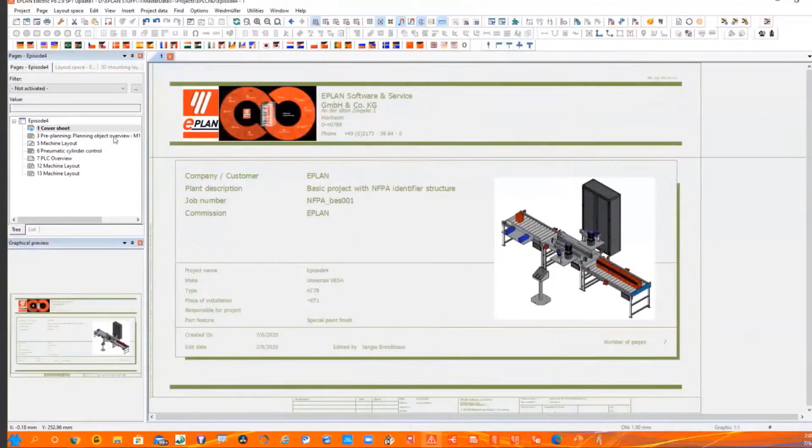As we proceeded with our episodes, we saw all the different facets and steps, and we derived from our project settings that during our pre-planning phase and schematic generation, we ended up with a pre-calculation of the amount of IOs that we need. Since the topic of the day is PLCs, this is what we're going to tackle and how we're going to blend this information together.

Knowing full well how we proceed through our different engineering processes, we have certain schematics assigned to our pre-planning objects. As we saw in previous episodes, we can insert these. And as we insert these different objects into our schematic environment, information is being produced. The benefits of all this are ease of functionality and the fact that we can also benefit from drag and drop and ease of use tools.

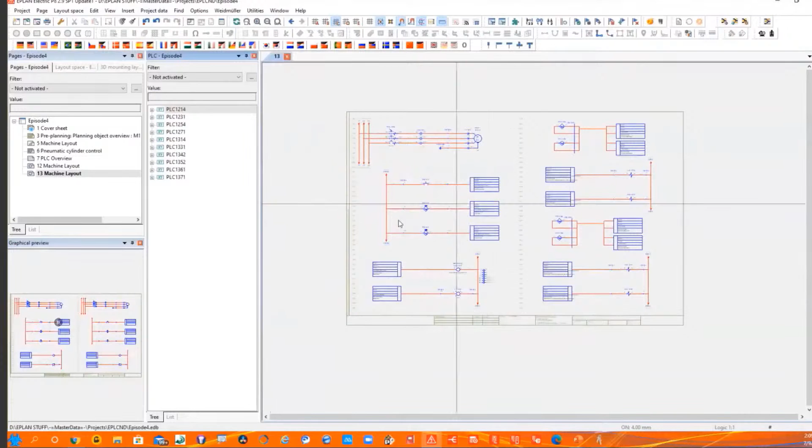As we're using and building up our schematics, we're putting PLC information inside the schematics. That PLC information will be found inside our navigator, depending on the IO. As we saw previously, even from this particular environment, we can also create different PLC overview sheets that give us a lot of detailed information. What we'll end up doing is use other tools to merge that - just as we saw in the animation previously, we want to avoid that separation between two disciplines.

What I have here is an environment, which is basically the Studio 5000 Architect. We do have other applications that we can communicate with, so we'll look into those eventually in some other episodes. But the benefit here is to have import and export capabilities. Based on our design, we saw from the pre-calculation of our pre-planning environment with our report that we have a small, simple project that needs 10 outputs and 13 inputs.

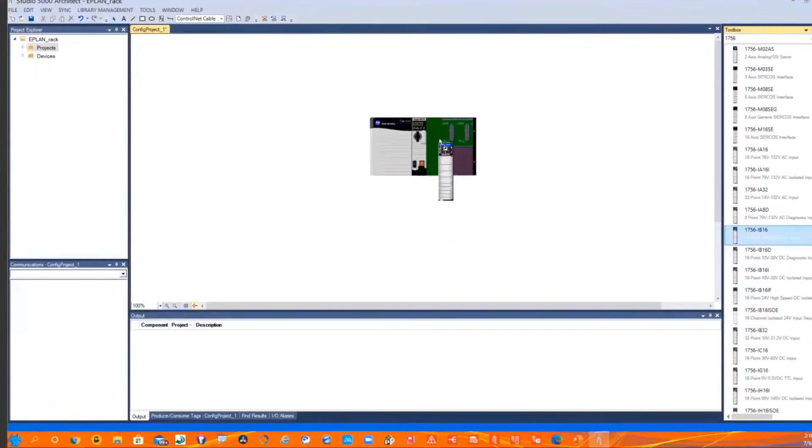So basically, an A4 rack would do me justice here. So if I drop in an A4 rack and go ahead and grab the controller, dump it in - again, the benefit of starting to work with easy and ease of use tools, the benefits start to unfold. Of course, the interaction and ease of use functionality greatly help.

Of course, you have to know how to use these tools eventually. But this is like any other application that you need, especially with the progression that these environments are going through and expanding, and all the changes - especially with the current situations - these are things we have to take into consideration. How do we make these things faster?

As you notice, what I exported is an AML file. We discussed AML in our podcast, so be sure to tag along, follow us on the podcast channel, and you'll benefit from all the cool information out there. AML, being the weapon of choice, has a lot of capabilities.

We're going to grab that file and import it into our project. So here, choosing the import data, I'm going to grab that AML file, choosing the one I just created, and bring that in. Basically, the system brought in 4 devices and 1 CPU, and I'm good to go.

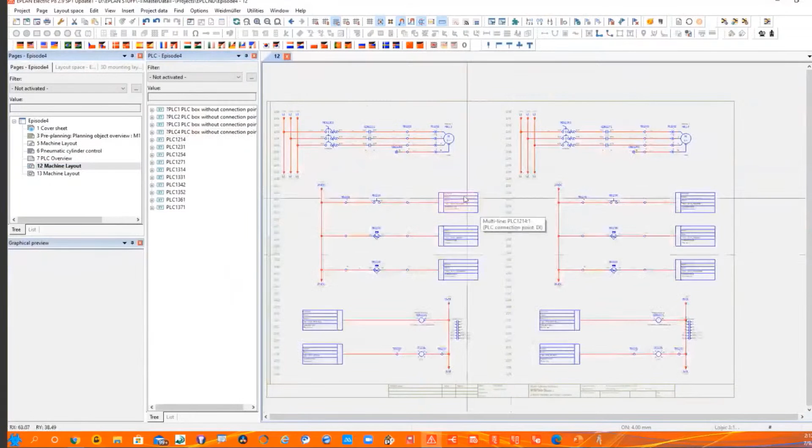So these devices are here, but they're generic. They're not necessarily correlated with my design. These inputs and outputs that I have here are brought in based on the macro tools I'm using, and they have generic information themselves. So here we have pin 111 and so on. There's no real correlation.

I'm going to grab that information and blend those two together. So grabbing the information that was brought in from the PLC tool, I'm going to blend that in. To do so, I'll grab a little filter to start with my inputs first, grab all my inputs, and choose here PLCs, and say use connection point blockwise.

From here, what I'm going to do is assign it to my digital IO card. I know I need 13 pins or 13 points, so I'm going to say 8 here, 1, 2, 3, 4, 5 — that's going to be my 13. They line up.

Now you'll notice that my connection points and all the data that was exported out or brought into my Eplan tool will now inherit the information that I had in my pre-planning environment. As soon as I hit OK, you'll see pin 1, 2, 3, and I have all the information and description aligned. I can proceed now to do the outputs.

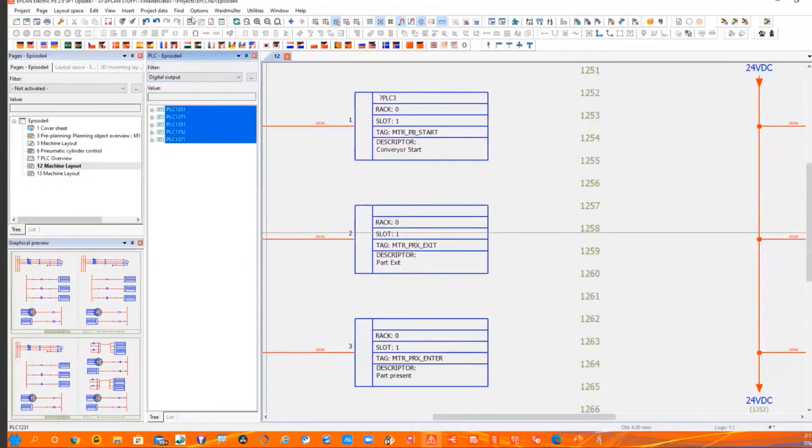Very simple steps. The benefit here, again, is the capability of having a tool that gives you an ease-of-use workflow, regardless of the fact that maybe back in the day you used to do things a certain way — that's 5, 6, 7, 8, 9, 10. Yes, I had to use my fingers when I was in school counting and doing math. But basically, once you grasp your head around these concepts, these tools will give you great benefit in the long run.

Having that done and integrated all my information, if I go here to my rack-oriented view, I have my project, my station, my rack, and all the different tools and hardware. And here, basically, I have some information that correlates with it.

The idea, again, is the principle of being able to have these two tools interact with each other. It's not a direct communication per se, but the concept is being able to grab this information and manipulate it in 2 instances by means of import and export, as opposed to using a third party, a script, or an Excel spreadsheet with macros.

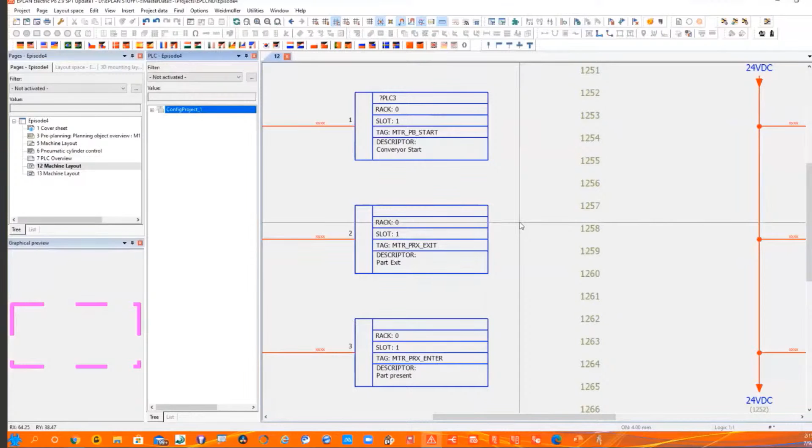All these tools are great. They all work. There's nothing wrong with any of them. It's just that there are certain benefits once you have your concept wrapped around — you can do these kinds of things. Hopefully this enlightens you on this topic. Let's go back here, and here we go.

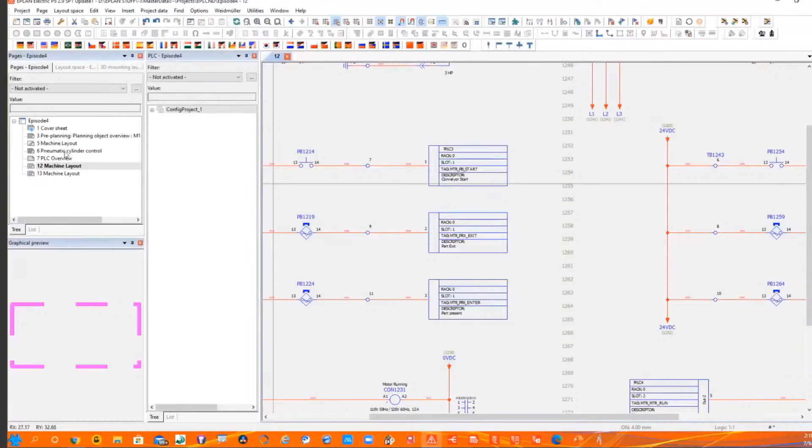Yes, of course. There's schematics to PLCs, but there's also PLC information we can bring in—whether inserting a device, like a PLC device, we can bring it into the schematics, benefiting from all the different functionalities as I showed earlier. If I grab an overview sheet from the PLC, I can, from the schematic point of view, grab that PLC IO card, drag it into an overview sheet, and I'll have the overview information of that sheet, along with all the representation data coming from the schematics into the PLC environment and so on.

So yes, from the PLC to the schematics we can import, and from the schematics to the PLC we can output.

Excellent, we have another question: can you generate blockwise macros via PLC to generate schematics?

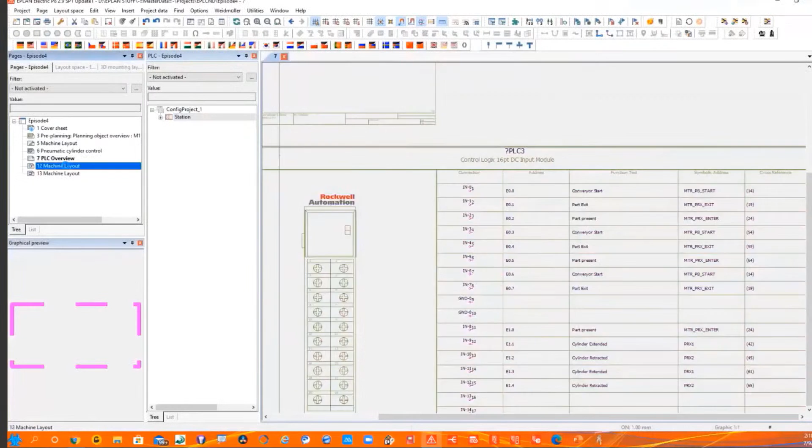Blockwise macros—okay, I believe, correct me if I'm wrong, we have the bitwise technique represented here, and this is probably not a technique a lot of people are familiar with. The benefit of this technique is that we can show on the schematics just the IO points that we require. As you just saw me do in the PLC overview, I can have the whole card overview in the form of a report that reflects what's actually happening in the schematics.

But inside the schematic environment, it all depends on the macros associated to your parts. In the part data for these objects, if I look at the digital input card and the properties in the part information, you can associate a schematic macro that you'll use for the auto generation function.

So this macro will be utilized to create—this is an overview, but you have multiple representations for this particular macro, so you could have a multi-line schematic, a single line, an overview, a whole bunch of them. These are the ones represented and used in the auto generation, so it's up to you to fine tune it.

We do have courses being put together on these, and we also have macros—the data portal has some macros available. There's been a lot of feedback about the data portal parts, so we've created a data portal standard and sent it out to all the manufacturers. They're starting to abide by those regulations, so hopefully it's up to them to put these things together better, and we should be getting benefits from using the new macro information and working with all these different features.

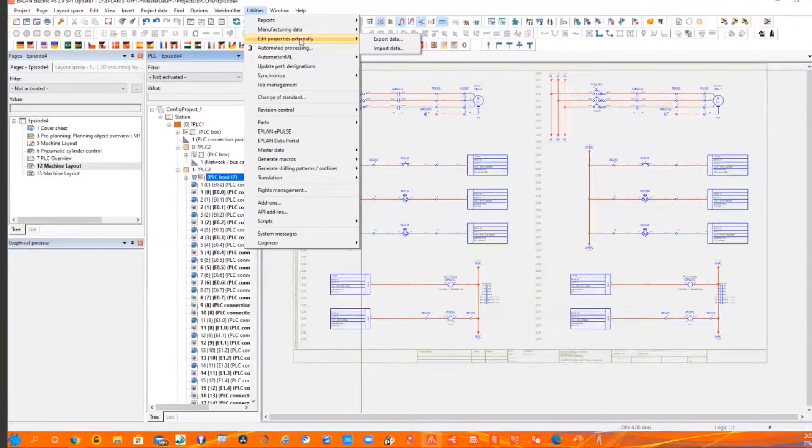There are also coaching services. One key factor could be for users who want more in-depth coaching, just like if you go to a gym, paid the membership, you're working out, but you want that extra oomph, you get yourself a coach who gives you all the tricks and tips.

Same concept, so let your sales rep know that might be something you're interested in. Thank you, Sergio. So we have a couple more questions. What information do you have to put into the parts in ePlan to be able to transfer information such as function text to Studio 5000?

The function text is technically the information that you get from the IO point. The function text property, or this basically would be the property, the description property, and the symbolic property. There are certain attributes. A lot of people have this misconception that it's just a magic wand. You purchase the license of ePlan and you can just sip your coffee while ePlan does everything for you, which is not the case, and that's with any tool out there. There are certain fields and properties that need to be populated.

We have some tech tips online. Rockwell created a white paper that's online that you can get your hands on, which really is a deep dive into the integration between ePlan and the Rockwell tool, as well as other applications out there. There's certain documentation in the ePlan information portal. If you Google that, you'll find tech tips there as well that explain what fields need to be populated.

So in this particular case, the function text will be converted over to the description. The symbolic address will also be brought into the PLC program in the proper fields. Just an example of need-to-know information.

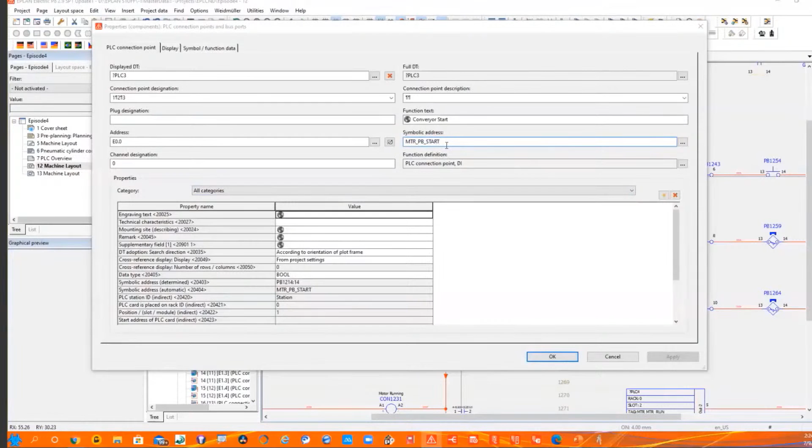These are knowledge-based information that you can ask us in support, and even with the coaching service, we can look at this more in depth.

Sorry to do this to you, Andrew, but we had two more questions come in right as we started the outro. Great job, everybody.

First one is, in your demo, you used Studio Architect. Is it also available in Pro Panel? There are packages available in Pro Panel. You would add the add-on of the PLC into your Pro Panel environment if it's something that you require.

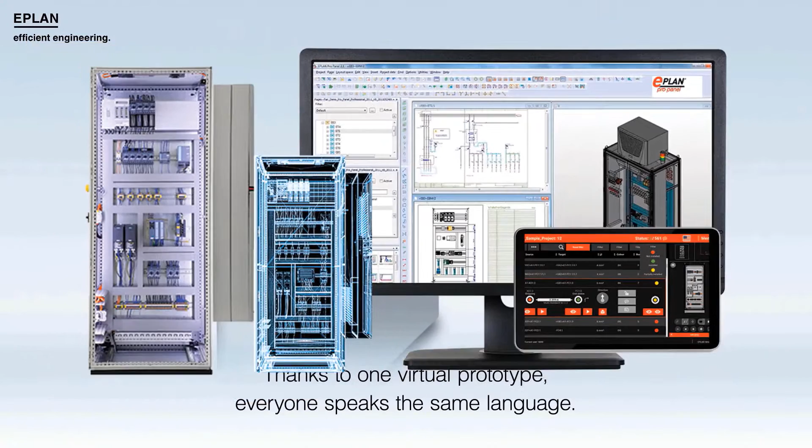Smart engineering stands for a smart connection of electrical, mechanical, and software data. Thanks to one virtual prototype, everyone speaks the same language. It opens the door to smart production. The digital twin with 3D info and other smart data ensures smooth communication between man and machine. The better and more accessible information is built up in the concept, engineering and production phases, the less time you'll lose later on in case of downtime.

You can also store everything in the cloud, so everyone has direct access to the right digital data at any given time. It's crystal clear: working in an integrated way creates added value, shortens the lead time of your projects, and reduces downtime in case of a breakdown. This way you create great added value for your product. Do you want to know how you can do this? The different solutions within the Eplan platform support you towards an integrated engineering and production process. Your digital transformation with Eplan.

Digital data has become a primary focus for product development and production, with manual and automated processes of panel building. Having standardized and digitally provided data is becoming a necessity. User errors are expensive, and implementing the correct set of wiring can be tedious and oftentimes daunting.

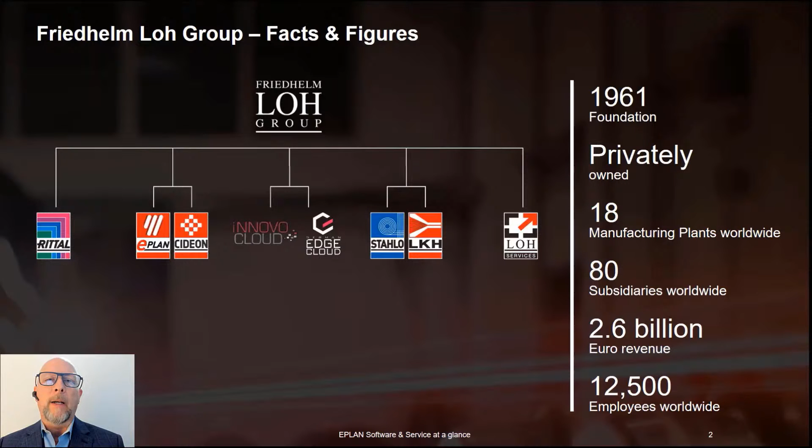Eplan, along with their sister company Rittal, are part of the Friedhelm Loh Group, a €2.6 billion company with over 12,000 employees worldwide. Eplan itself has 1,100 employees across the world, with 58,000 customers using 190,000 Eplan software licenses every day to execute their electrical engineering solutions.

Eplan offers a platform of solutions for multiple disciplines that all sit on top of a common data model that then resides in what we call the Eplan project. And this is where the power and value of the solution is derived.

At Eplan, we talk about an ecosystem of industrial automation. This consists of 4 different and distinct business types. There's, of course, the end use or the operator that's putting the automation solution into use.

There are the OEMs and system integrators who build the machines and pull it all together for that end use application. Someone, of course, has to build the electrical panels, so that's a business type. Sometimes the OEMs and integrators do it themselves, but also it's sometimes a separate entity, but it's certainly part of the solution.

And last but not least, it really all starts there, the end use operator usually selects a line of components to base their solution on.

And so when people execute an automation solution today, there's at least in the United States, a lot of handoffs that happen. I think this is the case globally, but more than ever here in the United States, we see a lot of disjointed handoffs in the way of drawings and spreadsheets and things like this. And that's an opportunity for errors and inefficiencies.

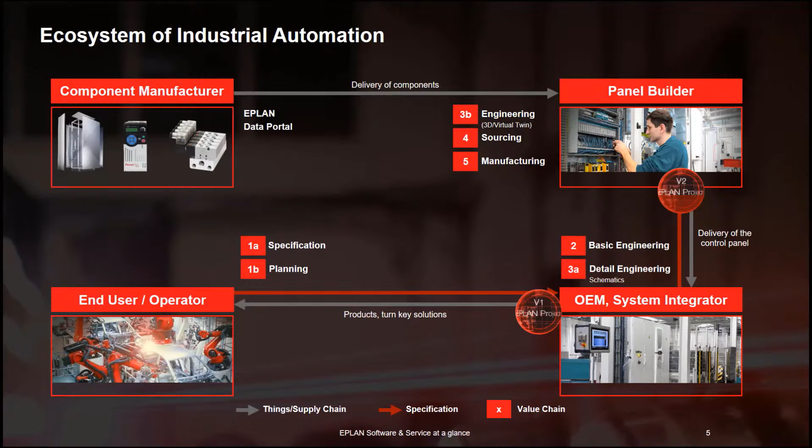No todos los OEMs hacen el diseño o la fabricación de los armarios. En caso de que se subcontrate la fabricación del armario, en vez de pasar la información a través de fotos o bocetos, se pasa simplemente el prototipo virtual del armario con toda la información relevante para la parte de fabricación, agilizando las operaciones del subcontratista. Y todo esto, seguimos hablando del mismo proyecto de Eplan del que empezamos con este ejemplo.

Naturalmente, una vez que el operador haya recibido la solución, la haya instalado y puesto en marcha, obtiene una documentación que llamaríamos as built, y empieza el ciclo de vida de la línea de ensamblaje. Durante este ciclo hay mantenimientos, reemplazos de componentes y de sistemas, y Eplan ofrece aplicaciones que le permiten al ingeniero de mantenimiento mantener siempre los datos y la documentación del proyecto de Eplan up to date. De esta forma no solo se tienen los planos as built, sino también los datos as maintained. Siempre se tienen los datos actuales.

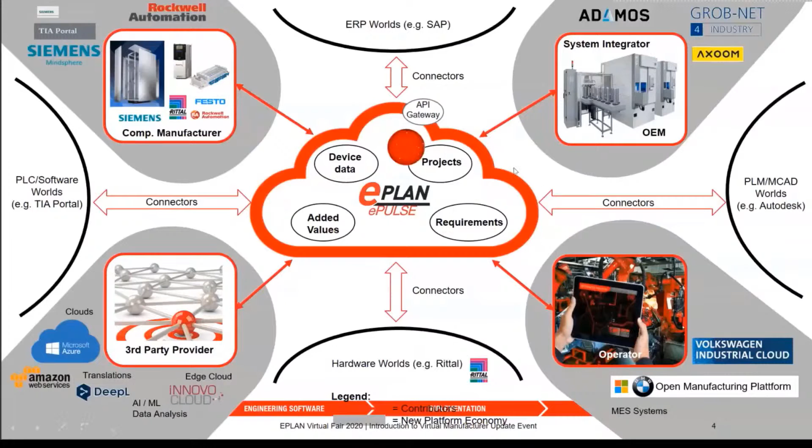And how we are realizing this journey, as it's really a big effort, you can see we basically generated three working packages. One is the on-premise world, where we still are, or at least a little bit in, meaning install your software, use the software, and then create a successful project. Horizon 2 is already some kind of transition into a cloud business model, software as a service cloud.

And we already have offerings that are hosted in the cloud, so you are warmly welcome to register for free at epulse.com. Just open your browser, type in epulse.com, and you can register without the necessity of being an Eplan customer right now. You can register there for free and get a first overview of what kind of tools we already have available.

Tools are things such as eView Commerce, eBuild, which is quite a fascinating story - it lets you automate parts of the generation of your schematics, BIM, eWire, or eManage. eManage is a small PDM electrical approach, like a small data management system, that's also already hosted as a service in our cloud. Last but not least, of course, the Eplan data portal, mentioned here as a first step. But remember, the Eplan data portal is not synonymous with the Eplan cloud offering - it's just a part of that.

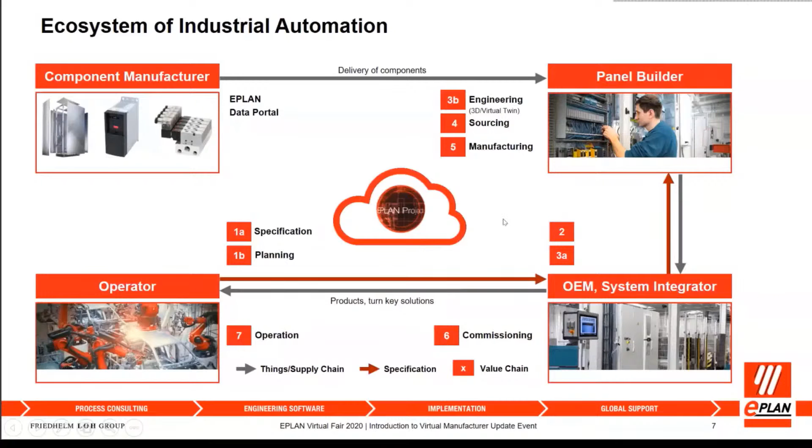So that's it already, this was my short presentation. I would briefly like to introduce you to my colleagues who are also on board here.

We have Jennifer Payne from the United States. I'm not sure if Jennifer's microphone is working and if she's a moderator, but she's the one who is... Hi, Jennifer, would you like to say about yourself, how you could help some American manufacturers, if you like?

Sure, thank you. I am the business sales manager for Master Data, and I cover the Americas, so the US, United States, Canada, Brazil, and Mexico. And I'm here to help bring new manufacturers onto the data portal as well as to develop them and answer any questions that they may have regarding the data portal. So if I'm here to help in any way that a manufacturer has any questions regarding our services and within our team, thank you. Fantastic.

Thanks a lot, Jennifer. We have 2 more colleagues based in Shanghai, Ling Zhu and Qingbo Liu. Both of them participated in our morning round that started at 8am already, and I believe they are not working anymore, it should be bedtime for them. And we have a Japanese colleague, Koji Yamashita, who likes to help you out in Japan. And of course our European colleagues, I think they're well known, at least to the manufacturers from Europe who are on board here in the call, Juan Castillo and Robin Heitzke. And that's basically our team.

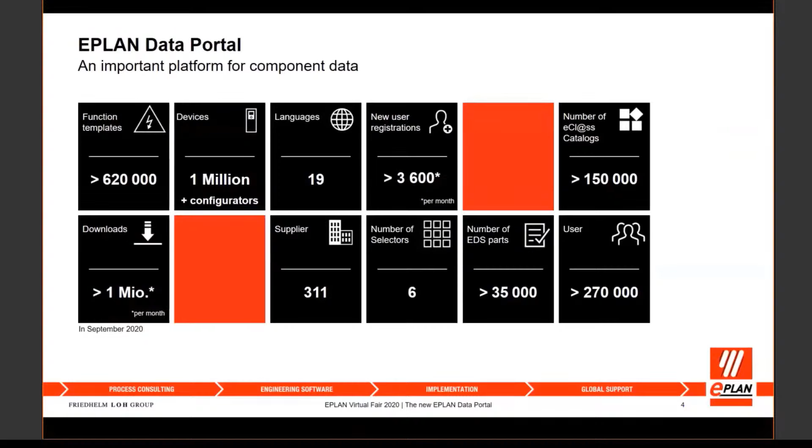In the data portal, more than 300 manufacturers offer their parts data at the moment, and this number is also growing continuously. At the moment we have 6 selectors or configurators from leading manufacturers, with which users can easily select or configure parts or part variants which fit their needs. The number of Eplan data standard parts is also continuously growing, so more parts data are available in a standardized format, which is an added value for users. At the moment, already more than 35,000 parts follow the regulations of the Eplan data standard.

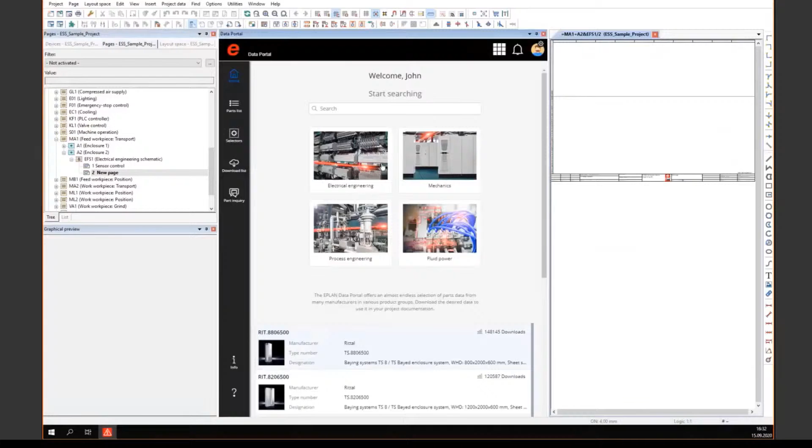It takes some time for loading, but not too long. So this is the homepage of the data portal. At the bottom you can see famous parts which are frequently downloaded, or you can directly start your search. First, I'd like to show you the parts selection via catalog selection, and I start by clicking on the discipline I want to use, for example electrical engineering. Oh wait, there are still filters from before — so I choose catalog, Eplan catalog, and electrical engineering.

Now I'm searching for a rotary actuator. So I choose electrically operated mechanical devices and click on Apply. Here in the part lists, you can see your active filters at the top.

Here you can see which data types are available for these parts: part number, manufacturer, and a small designation. Also, this part follows the Eplan data standard, shown by this flag. So I choose this part and add it to my download list. Here you see the message of success, it's added to the download list.

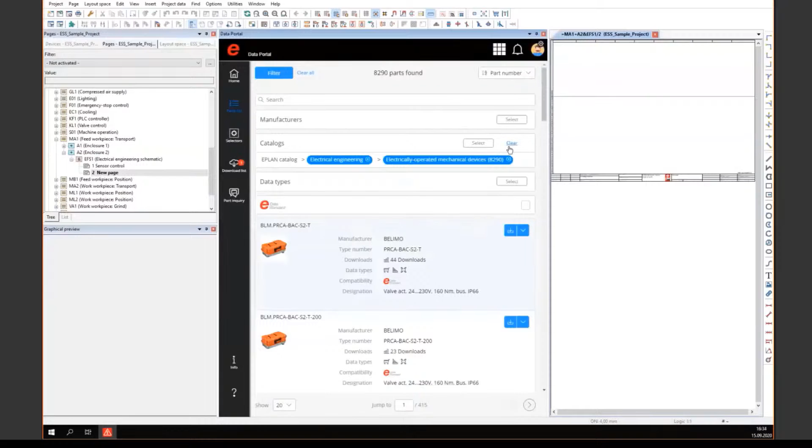I clear the filters and show you one more catalog selection. Again, Eplan catalog, electrical engineering. Now I'm looking for a contactor. I scroll down and choose relays and contactors, then contactors, apply.

Now I choose the sorting. The default sorting is the part number, but I want the most downloaded parts, which is this Siemens contactor. Here you can see the number of downloads, the type number, and which part data types are available for this part.

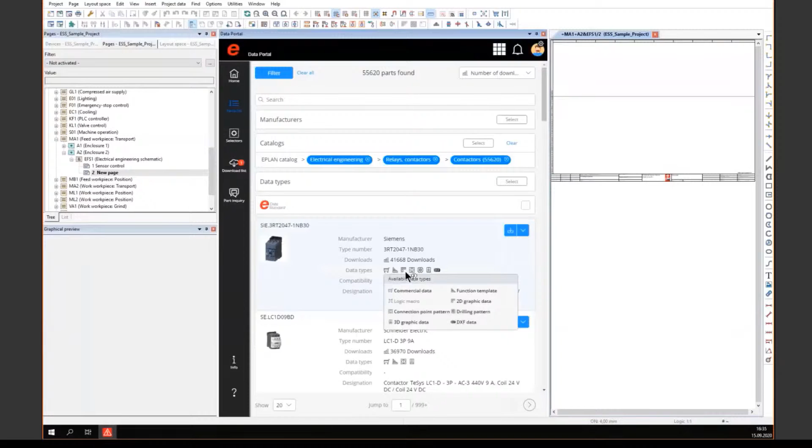I switch to the detail view now. Here you can see some pictures of it, some accessories connected to this part, and I can also switch to a 3D viewpoint, turn it around, and check whether this part fits my needs.

So let's assume it fits my needs, I add it to my download list, to the parts list. Now I'd like to search for a part by typing in what I'm searching for.

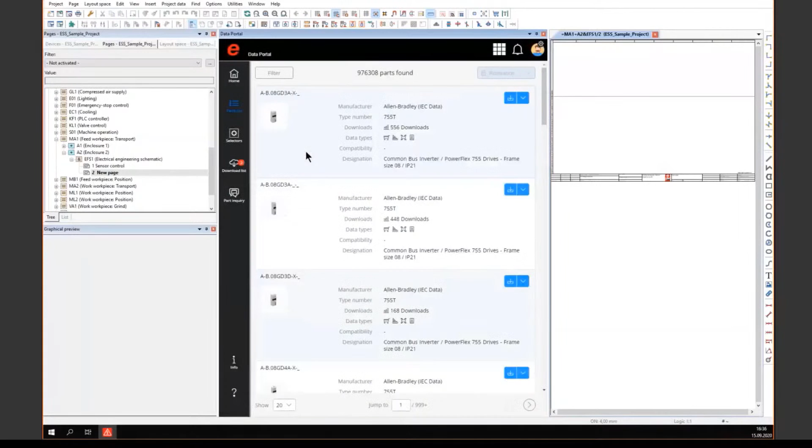Let's assume I know what I'm searching for, and I'm looking for a ground modular terminal block. So I type in PT 2.5 PE, press enter, and here is this part, exactly what the type number is, exactly what I was looking for. I say yes, this is the one I was looking for, and add it to my download list.

Okay, maybe I remember that this was the one I was looking for. Here you can also see again, Eplan data standard is available for this part, and which data types are available. I add it to my download list.

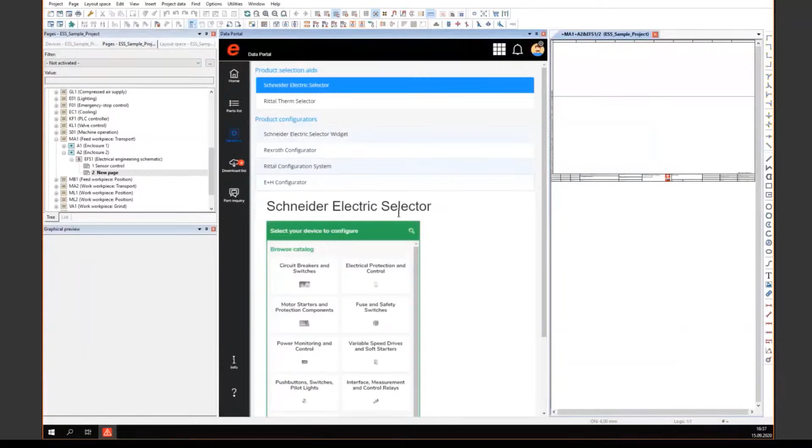So one more part to select. I select a selector, for example, Schneider Electric selector. These are selection aids from leading component manufacturers. At the moment, as I mentioned before, we have 6 of them.

Now I'm looking for an electrical protection from Schneider Electric. I scroll down, I choose this one, and here I'm asked to give some technical parameters. Let's assume that I choose just this.

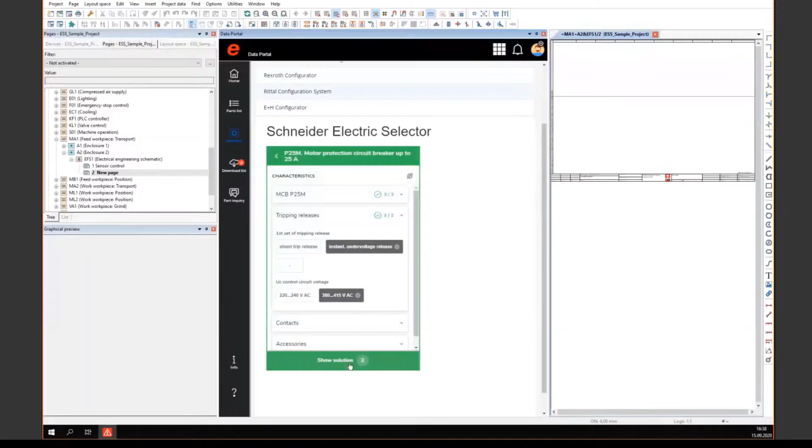Down here, I can make more technical selections. I can type in more technical parameters, for example, this and this. It's not necessary, but okay.

So now I have one part and one accessory. By clicking here, I added both to my download list. So now you see here all the parts we have chosen. And now I show you how to import them.

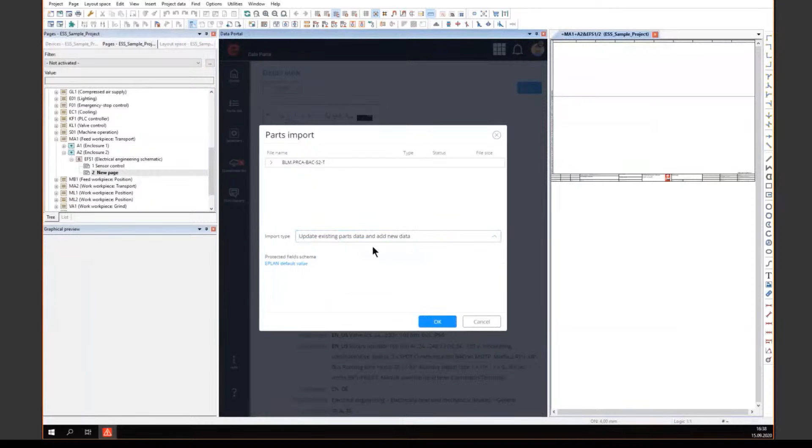First, I'd like to import this part. Here you can see the macro. Now I open the drop-down menu by clicking here on the blue arrow and I say insert part. I'm asked again whether I want to import it and which import type I want to use. I choose update existing parts data and add new data.

Here down you see the download, and the message import was successful. And now when I go to the empty page of the project, I have the macro. It hangs on the mouse pointer, and I just can place it. As usual, I'm asked for the insertion mode. I say OK, and that's it.

One more example. I can download the complete download list, and with one click on import - it would take too long now because of the loading. But I will import just one part. For example, I mark this checkbox and import it as usual from the download list.

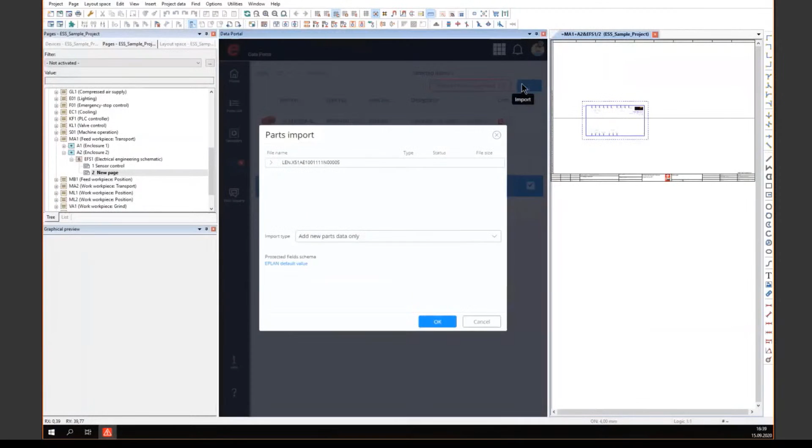Again, I'm asked whether it's okay. I have to click here again on import, and then this part is imported and downloaded to my local parts management.

I see the sand clock, so it's loading. Yes, import was successful. And now I will just enlarge this page.

I can, as usual, insert device by tapping the right mouse key. Insert device. I remember that this part I was just downloading was len.x, and here it is in my local parts management. I click on OK and can import and place it on the empty page in my project.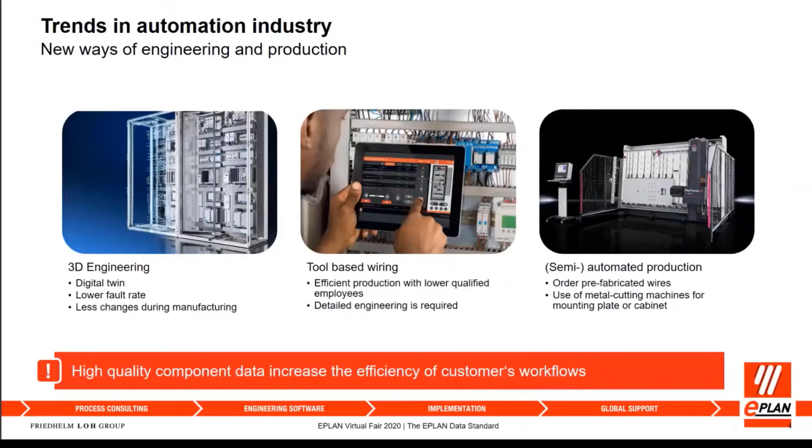And so that's the feedback from the users, that they like the Eplan data portal. As Josephine has shown, we have a lot of users in the data portal, and the number is constantly growing. But still, the users say that they have a high effort in data maintenance, because they download the parts from the data portal, but then they adapt the data according to their needs in order to set up automated processes and highly sophisticated processes based on the data.

They need the data in a standardized, uniform way, and they did not find it in the data portal yet. So what we decided last year, and what we are still working on this year, is the topic of the Eplan data standard. So it's the first time for Eplan that we define the style and the content of a data set in the Eplan data portal.

The customer has up to now, if he does not find standardized data and needs to create it on his own, needed a lot of time to create this data. For example, for basic data, it's not so much effort to do it. For basic data and documents to collect, the customer needs approximately 5 minutes.

But when it comes to Eplan specific data like engineering data, this is the function template in Eplan and the logical representation, the macro in Eplan. This takes up to 1 hour of work for the engineer to create the data by himself for each component, 1 hour per component. And also these manufacturing related data like connection point pattern, drilling pattern, and 3D macro - this is depending on the complexity of the product. It's also up to 1 hour of work for the engineer to do.

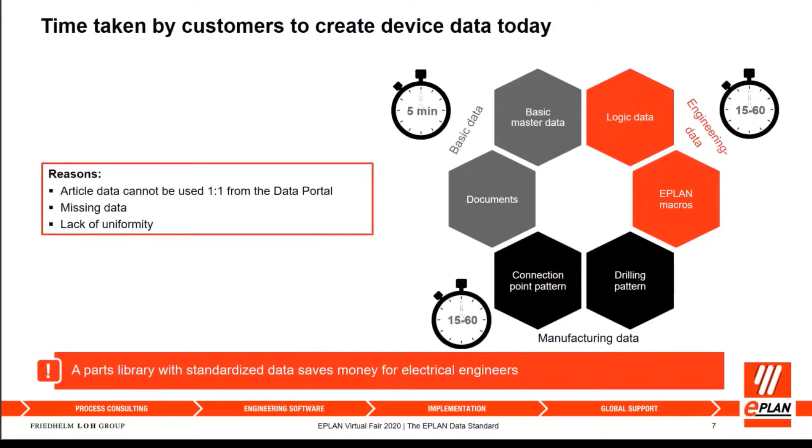So we sat together with a lot of customers, especially big customers, and had a look at their processes. So we have seen, okay, there are different process steps that are component data related. For example, for the process step part selection, the customers need, of course, the manufacturer of the component, the part number, but also some technical data, the sales status, and so on.

And there are next component steps, then typically the creation of schematics and part lists, where the customer needs the electrical representation, function template, and product photos, for example. They are doing calculation based on component-related data, so they need the weight for every component that they are choosing. Then they are doing the panel design and the production, where they need the 3D files, connection points, and so on.

Then they are doing the complete documentation, so they want to hand over the whole engineering project to their customer, and they want to document every component with the data sheets, for example, and also for some logistical processes, they need component-related data. So this is all the data that the customers needed, and we ordered it last year, and we defined out of this data that is needed a set of mandatory data that we want to collect from the component manufacturers and upload it in the Eplan data portal.

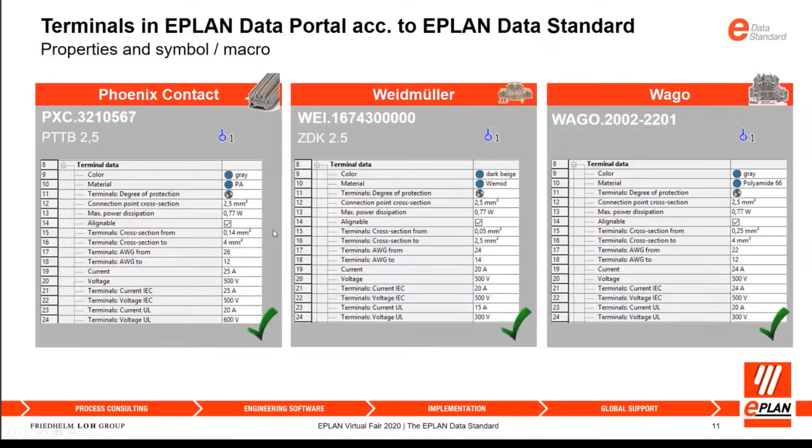So in the end, there are definitely differences between all the parts data. In the future, when we follow the standard, this will not happen anymore. Then in parts management, the description of these parts in the Eplan software is unified, and can be used very easily for automated processes later on.

Another example for this non-standardized data: think about creating a bill of materials. Think about you are a panel builder or machine builder, and you have the task to build up the machine and hand over the documentation to your customer. And of course, you have to build then a bill of material.

When you want to offer this bill of material, you would not offer it to your customer because it's not a professional way. And there, again, with the Eplan data standard, this will not happen anymore. We have a unified way of providing this data, and the customer does not need to change all the data sets by his own, but can download the data, and then the bill of material directly looks better, with a more professional style.

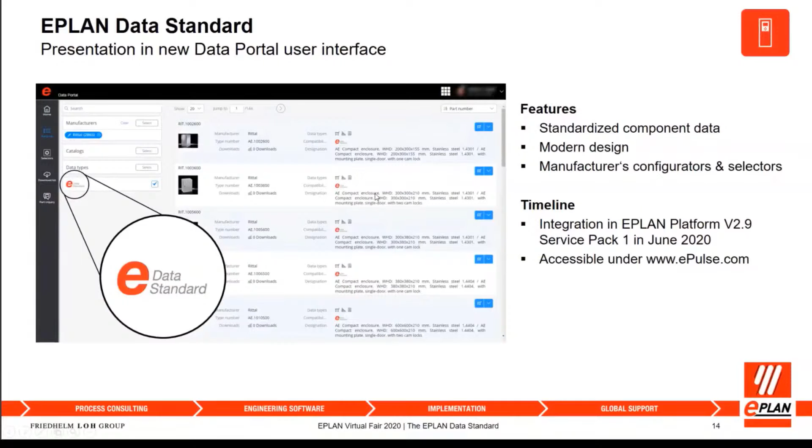So the conclusion: what is the Eplan data standard? The aim of the Eplan data standard is to help our users automate their processes in this software. To go in an automated way with your processes, you always need standardized data, because otherwise you cannot automate the processes. This is what we are doing with the Eplan data standard. We fill the gap to enable more and more users to go with these efficient automated solutions, which are useful for generation of schematics, but also for wiring and drilling machines. So the whole process of engineering and production can benefit from this Eplan data standard solution in the future.

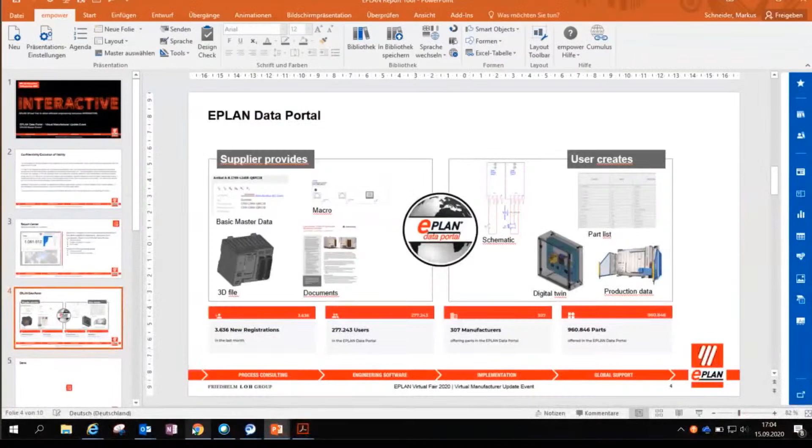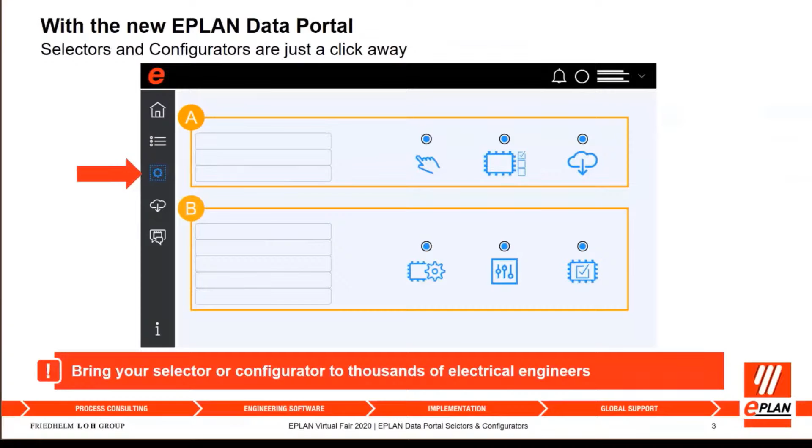So the new Eplan data portal is a win-win for manufacturers and our users. With our modern user interface, the selectors and configurators are really easily visible. It now becomes a valuable sales multiplier for device and component information that our users can access very quickly. It enables users to integrate them directly into their engineering projects and create bills of materials for procurement. So when manufacturers offer selectors and configurators, users are able to save time through this direct transfer of component data.

So we offer 3 different options for our manufacturers if they'd like to integrate their data into the Eplan data portal. We have a selector, a basic configurator, and then an EEC configurator.

With the selector, there is no data generation. This is basically opening up a link and an exchange of information, so the manufacturer would have to have an existing web selector. 95 to 100% of the selection variants are available in the data portal. The nice thing about having a selector is that users are familiar with how it looks in the field—if they have experience using the manufacturer's selector already, they're able to easily do that within the data portal.

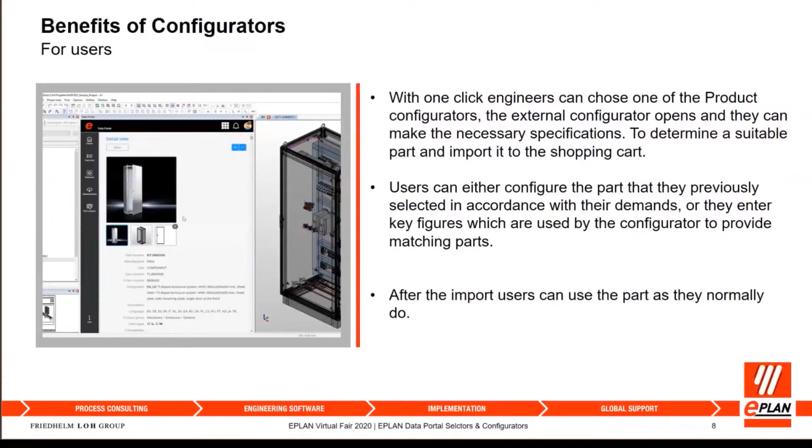This is just a quick demonstration of the selector, if you could see it—I know Josephine did go over it before. With a click of a button you can select the selector, and then the user is able to select the component they're looking for. They can easily calculate the information within the selector and then easily download it into their parts list.

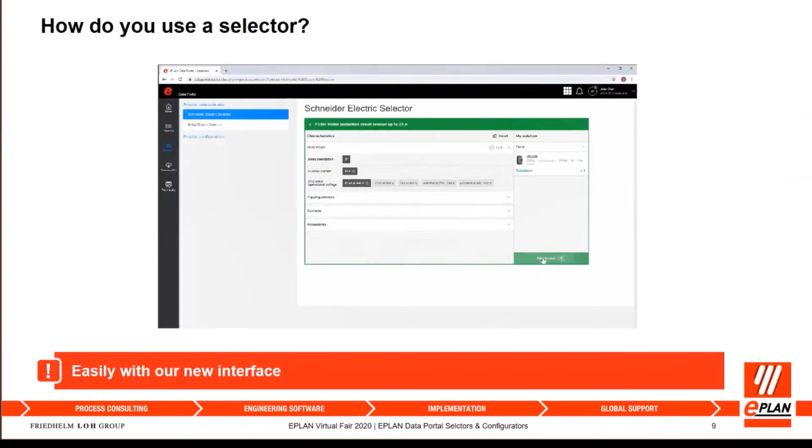And so again, we like to just say with a click of a button, that's really easy with the new interface.

So what are the next steps? You can contact any of the master data business sales managers within your area, and then we would define what entry point and what you would like to move forward with, either a selector or configurator. Then we do an evaluation, and then we would follow up with all the technical teams that need to be involved with the process.

So thank you for your attention. I gave this presentation this afternoon, or morning in the U.S., and my colleague Juan Castillo gave this information also in the morning, so we put both of our information together. But as I said, you could reach out to any of the business sales managers in your area, and they can help you. Thank you.

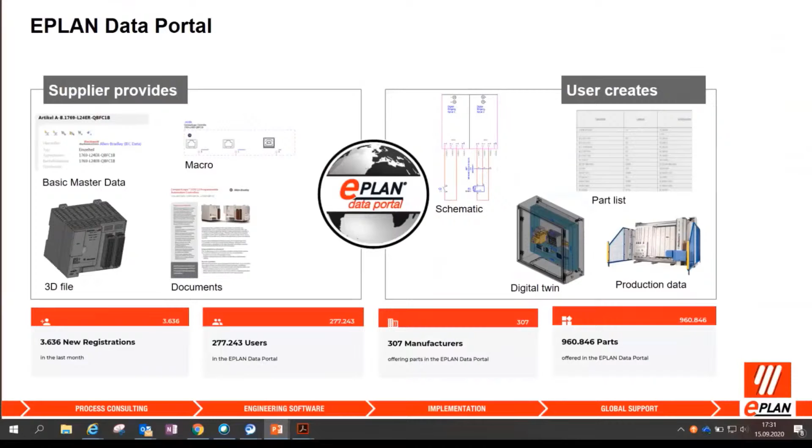Eplan data portal - I don't want to bore you with this again, so I will skip this slide. You heard it more than twice.

But here I would like to hold on a second. Thomas has presented this slide during his session, but this is very important and I would like to underline it. When we're talking about the content of the Eplan data standard, when you can see which functionality we have to fulfill with this standard, you can imagine that it isn't very easy to find a neutral exchange format which contains all the needed information for this. And this is what I meant before when I mentioned using synergies with classification standard.

Now we have this standard. It is the standard eCl@ss Advanced, from a non-profit organization in Europe. With this exchange format, we are able to generate all the needed data groups, let's say it this way, to fulfill all the engineering processes which Eplan users have to fulfill.

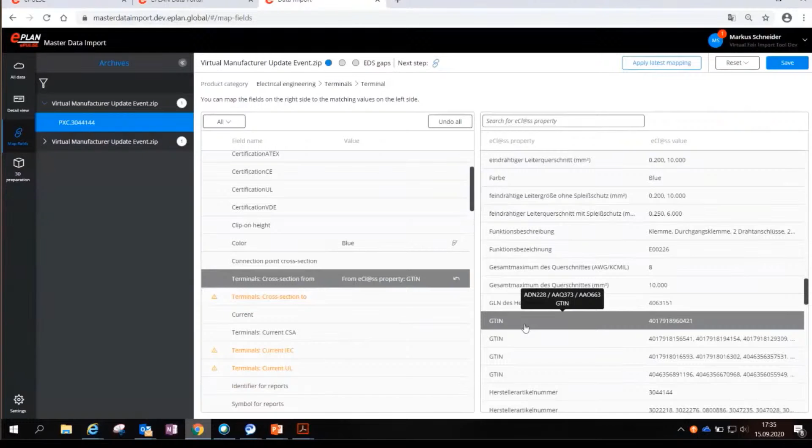And when you finish this, the second dot would switch to blue. And when all dots are blue, you can publish this data.

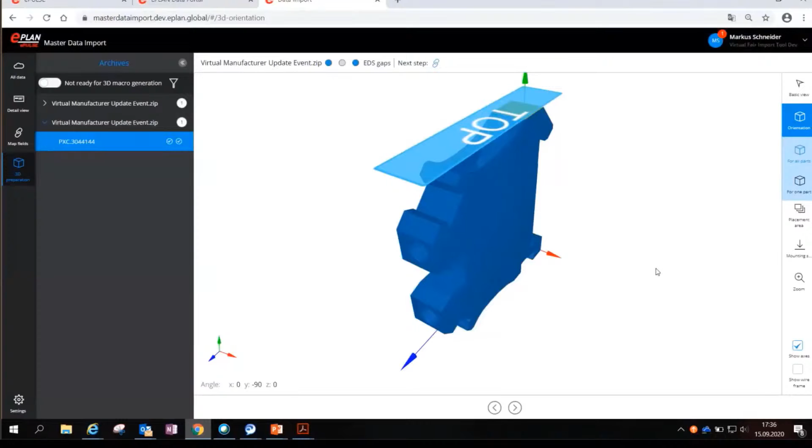But I don't want to waste too much time now, and would like to show you what you have to do with this third dot. Here you have to give these 3D files the correct orientation to fulfill all the requirements from all Eplan services. Here, when Thomas has mentioned the digital twin, and Josephine as well, when we're working with this, we would like to have a 3D model to reflect our cabinet, I guess this is well needed. And here is what you're doing: you have to give the correct orientation so that you can fulfill all the needs from the engineering processes from Eplan.

And with this, if you have done all this, for sure you can delete it, but then you can press publish, and then this component data will be forwarded to the Eplan data portal.

The quality check will be done automated. This is on our roadmap. I can't promise you when we can finish this, but I'm quite sure that we have the first process for this ready in the upcoming months.

This was it for the eCl@ss file and for the automated process. But what I mentioned before is we have the possibility to check a data set regarding these EDS standards, so you have a very easy tool to check if your component data are ready for EDS or not.

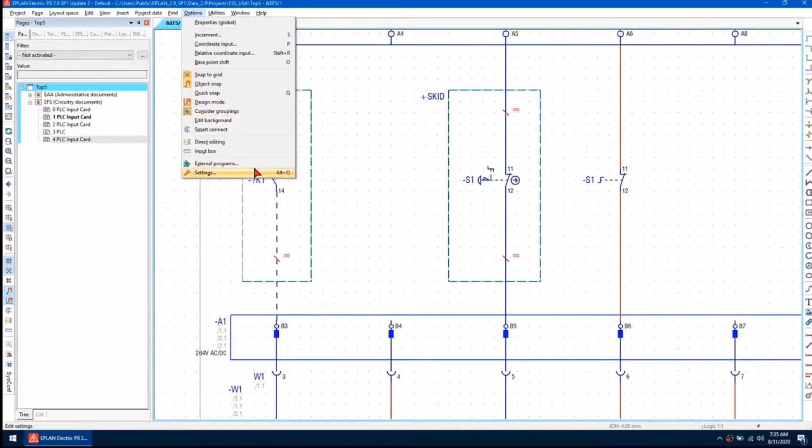So we need to check some settings first. We go to options, then settings, then the project, then the name of the project, and then in graphical editing under the general tab, make sure draw structure box with the recess is checked.

Once that's done, I just double click on the structure box and change the value from left top outside at 0 degrees to left top inside at 90 degrees like so. If I click OK, you can see that this now matches up.

To make this setting apply for all new structure boxes I insert, I can double click on it and toggle one of the values. I like to change this from bold and then uncheck it, and now I can save this with a new name, so I'll call it demo default. Then use it as default from now on and click OK, and if it already exists, you can overwrite it like so.

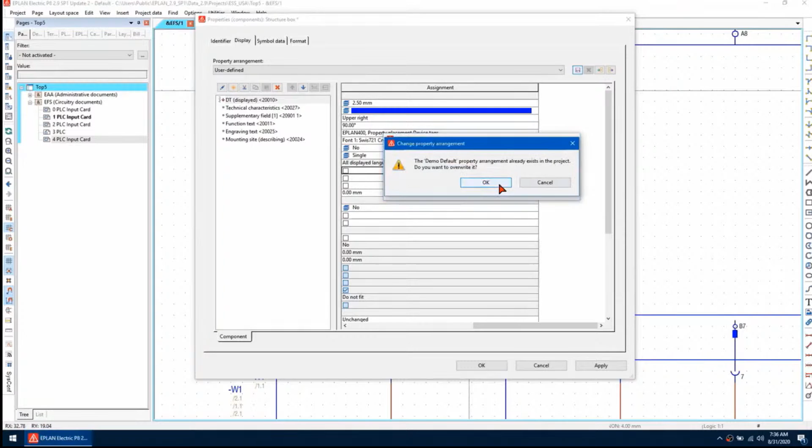If I click OK, I can insert a new structure box. I'll just give it the same name, so I'll call it skid, and click OK. Now you can see that this one inserts like the other ones do.

How can I create a macro project? The easiest way is to take a copy of the project you're working on. So here I'll go to project, then copy, and give it a name - I'll call this Top 5 Macros. Then I'll go for only interactive pages and click OK.

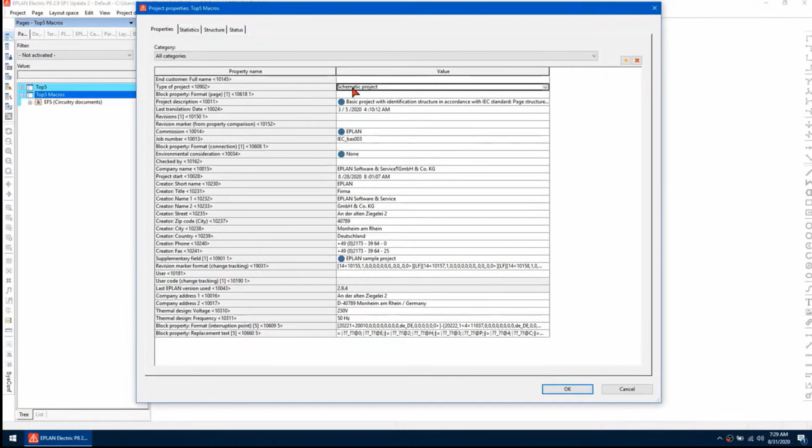Now I've got a copy of the project. The only thing I need to change to make this into a macro project is right click, go to properties, and change the type of project from schematic to macro project.

When I insert an accessory in Pro Panel, how do I change the orientation? So I'm going to drag this terminal cover in here and snap it to the top, and you can see that the rotation of this accessory is correct. If I try and place it on the bottom, you can see it does not rotate as expected.

You can manually rotate this by pressing Ctrl, Shift and R, and press it again to get it upside down. Then when I place it, you can see it's going to snap there correctly. We can make an adjustment to this macro so it will always place the accessory in the correct orientation.

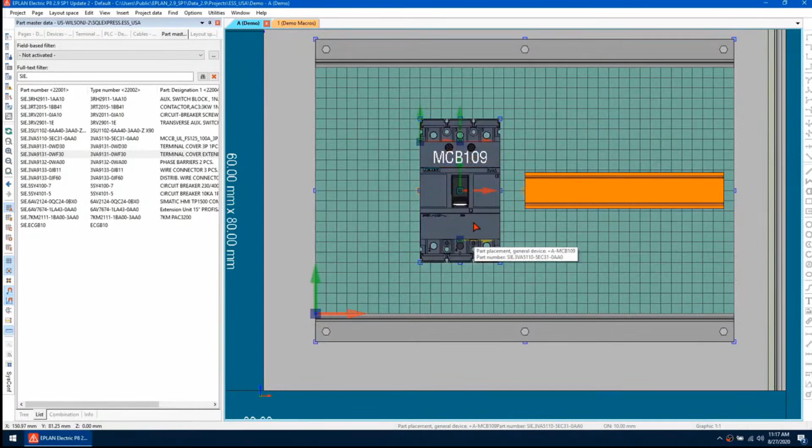To do this, I can cut this device from the cabinet, and it's going to ask me for a base point. I'm just going to use this one here. Then if I jump to my macro project, which I've got open here, I can go into this new layout space I've created and just paste it.

It's going to ask me for a base point, but it doesn't matter where this is, so I'll just place it here. Then in the macro project, it shows me all the different mounting points on this device, and I can see this bottom one is the one I want to work with. I can see the Z-axis is pointing up and away from the device, the Y-axis goes up, and the X-axis goes to the right.

To rotate this, we can click on the mounting point and go to Edit, Graphic, then Rotate Around Axis. The axis I want it to rotate around is the Z-axis, so I'll click this one here and type 180 degrees. Once I do that, you can see the Y-axis is now pointing down.

So when I insert the accessory, it will be placed in the downwards orientation. Once I've done that, I can right-click and go to Properties, and I'll grab the macro name here, select it all, and copy.

And then I'm going to go to this new layout space and go to Properties down here. I'm just going to paste in the macro name here. So I'm going to paste the name here also, and this is just because I like to organize it by the actual file name. So I'm going to hit OK.

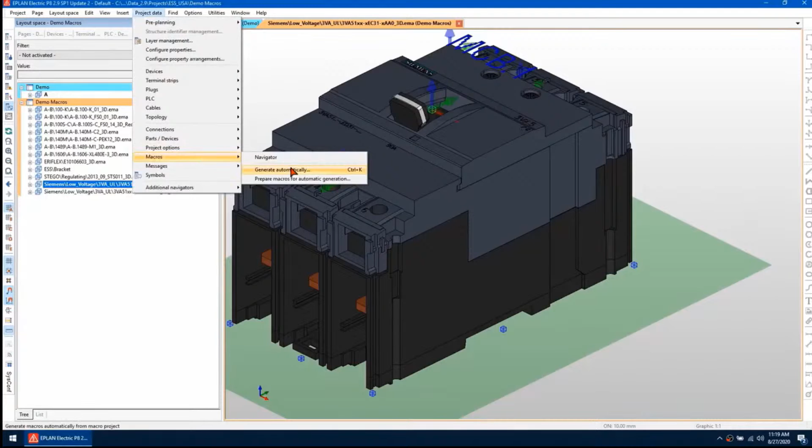And then once I've done that, I can regenerate this macro. So I can go to Project Data, Macros, Generate Automatically. Make sure you've got the Overwrite Existing Macro box checked and click OK.

So now when I go back to my demo project and place that same device, if I go to Devices, mine was MCB109, I can drag that over like so. And now when I place that terminal cover, I can see that it snaps correctly here and also here. So I don't need to manually rotate it now in the future.

I've made changes to a macro, but when I insert the macro, I do not see these changes.

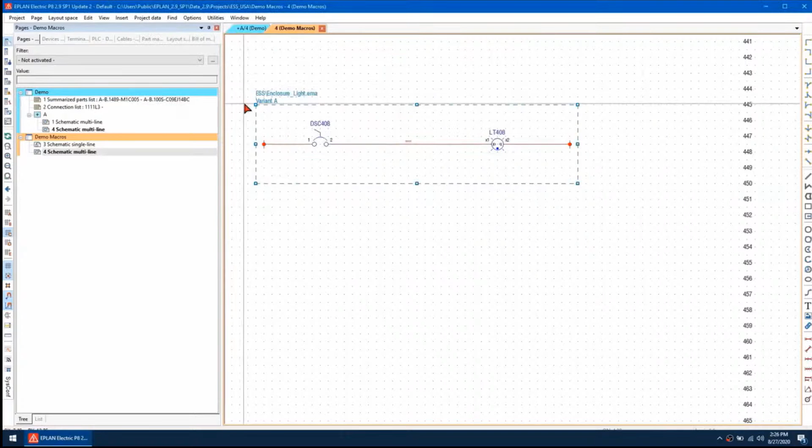I have a simple macro here, and I'm just going to regenerate it by going to Project Data, Macros, and Generate Automatically. Notice this is variant A. I'm going to go to my schematic project and insert this macro, and then place it here.

I'm going to update this macro by taking a copy of it, and then I'm going to paste it below here. I'm going to make a simple modification to it. I'm going to make it 2 lights and wire these ones up here, like so.

I'm going to change the variant to variant B. And then I'm going to regenerate variant B.

When I insert this new macro, I should have the options of variant A and variant B, but notice how variant B does not have the additional light. So what is going on?

So if I go back to my macro project, I can click on the macro box and right click and go to select associated objects. As you see, only this first circuit is highlighted, so that is what is included in the macro box.

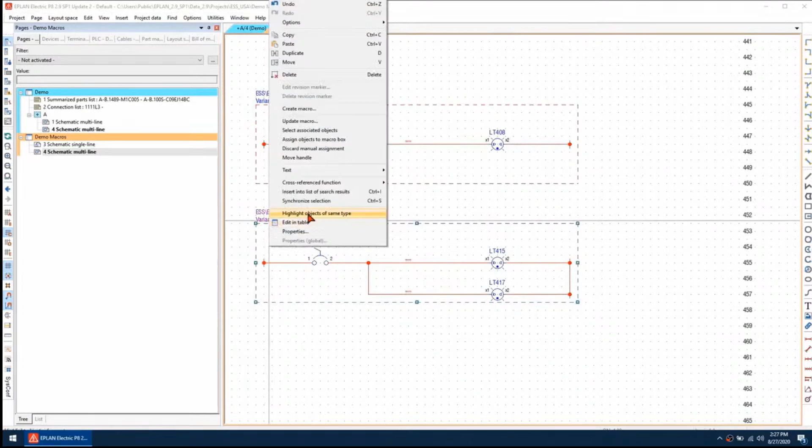We have a few options to correct this. One way is to select everything inside the macro box, like so, and then right click on the macro box and go to assign objects to macro box. So now when I right click on the macro box and go to select associated objects, you can see everything is highlighted. We can also do it a different way.

So if I go back a step and change this back to B, and I do my select associated objects again, I'm back to my previous step. So another option is to double click on the macro box and change this setting here, manual object assignment. If I uncheck that, Eplan will automatically include everything that is inside the macro box. So if I go to select associated objects here, everything is now included.

So I can regenerate variant B by going to Project Data, Macros, Generate Automatically. Okay, so now when I reinsert the macro, it should be functioning as I expect. So here's variant A and there is variant B.

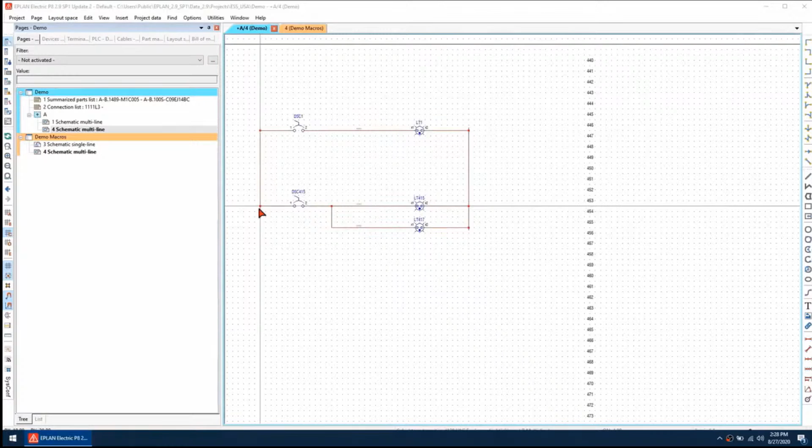When I insert a macro with a placeholder object, how can I delete or hide these?

So here I have a macro that I inserted from the data portal. It came with 2 placeholder objects that I can use to adjust certain values on this macro. Sometimes it's desirable to hide these, and to do that, the easiest way is to change the layer visibility.

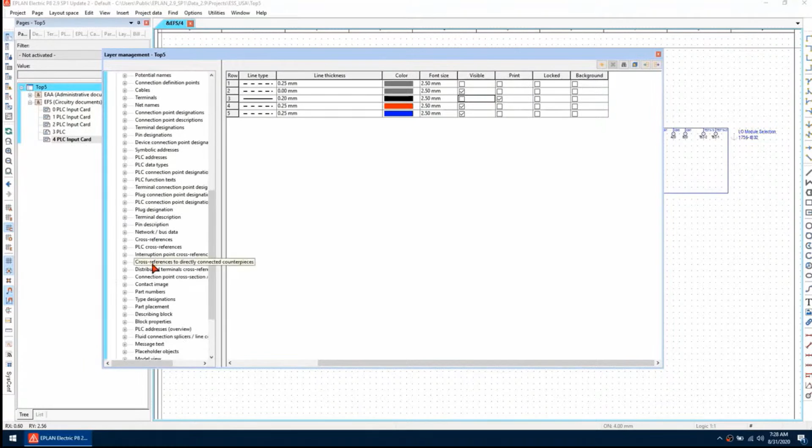So to do that, let's go to the project data and then layer management. And the 2 layers that we're interested in are the macro layer here, so Eplan2020, and the placeholder object. So if I just scroll across to the right here and uncheck the visibility, and then also the property placement for the placeholder object down here, and this is Eplan551.

I just scroll across and change the visibility, and then I can close out there, and as you can see, they now turn gray. And if I go to view and then turn off invisible elements, now they are hidden.

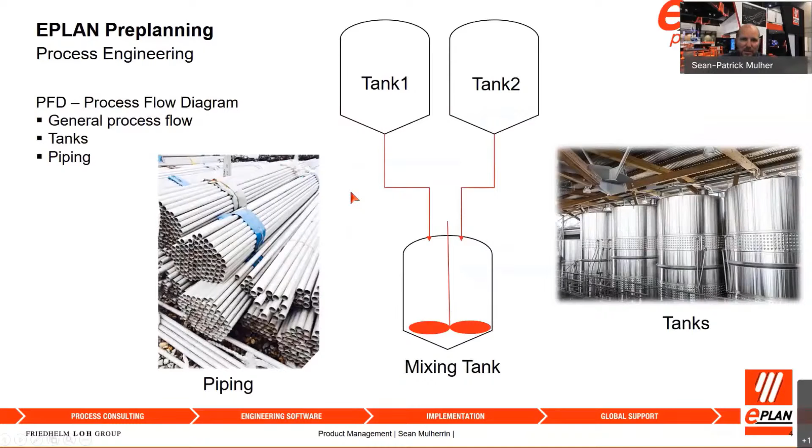Pre-planning can help you capture right up front all of your elements for process flow diagrams, such as defining your tanks, all of the parameters associated with those tanks, identifying what type of tanks you have, as well as the piping between those tanks to carry the various substances from the different mixing and processing tanks. Then you can capture all of your actuators, which are the devices that help you carry the substance from one tank to another, such as your pumps as well as your valves.

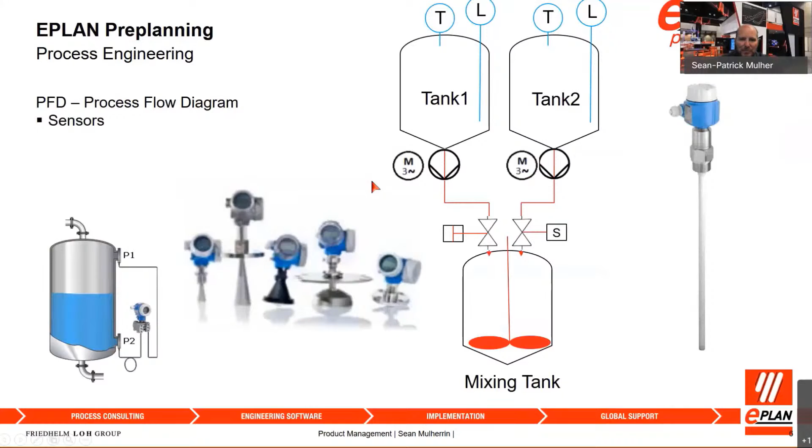Some of these valves are pneumatically actuated, where Eplan Fluid comes in to control all of the airflow to those specific actuators. Pre-planning also allows you to capture all of your sensors - temperature sensors, pressure sensors, level sensors, flow sensors - all of the sensors that help you monitor and control your process system. Once those items have been captured, you can also use pre-planning to tie them all into instrumentation devices, linking the actuators, pumps or valves, with the temperature or pressure sensors in any given device to make sure the process is correct.

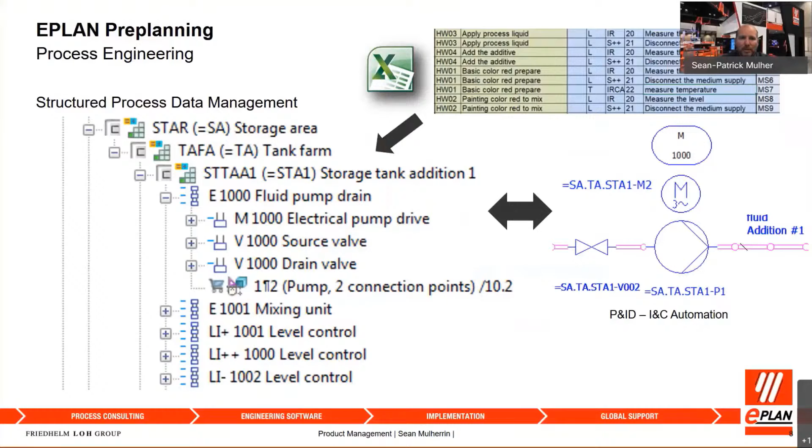Additionally, if you have data already stored in Excel sheets, such as instrumentation lists, device lists, equipment lists, or signal lists, all of those types of lists can easily be imported into Eplan and used as a starting point for your design or a starting point for information into your detail engineering.

Here we can see a structured view capturing all of your I/O requirements. So signals, whether inputs or outputs, digital or analog, can already be captured early on in the process design system and made available for your control systems later on. Additionally, importing data from external sources can help you create data for your system easily in a structured environment.

Pre-planning provides you the option to generate reports - data sheets, specification sheets, equipment lists, cost estimation, signal lists - all these types of reports that today are typically captured in Excel or Word documents. You can easily generate these reports in Eplan and then use them further down the line or with your supply chain if needed.

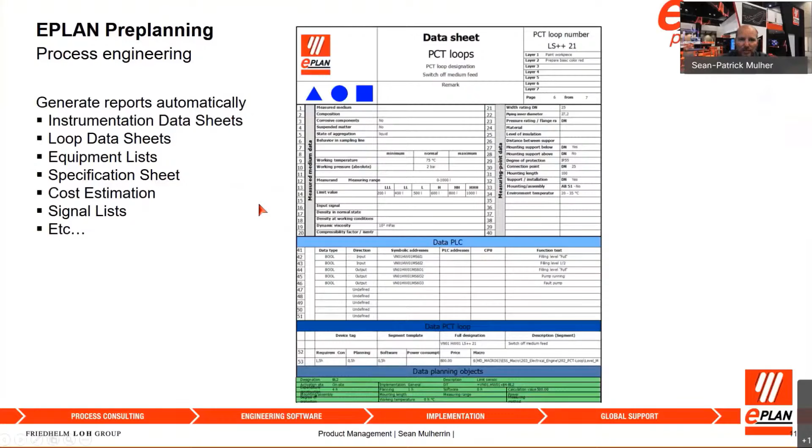Eplan pre-planning can also be used as a quoting tool, meaning that once I've created my P&ID or imported data using my structure, I can report this data and summarize all of the requirements, such as identifying how many I/Os I need, digital or analog, or calculate the planning time, the costing time, the construction time, or the software programming time and the total cost. These can all then be added in a report and used for quoting purposes to get an understanding of how much that system is going to cost.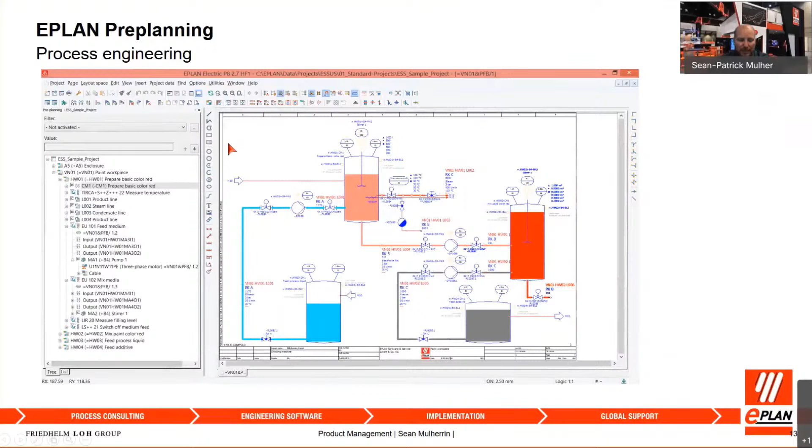So at the end of the day, pre-planning would be your tool in the food and beverage industry to help you design your process control system. Let's jump into the software and see how that works live.

Here I am in the Eplan platform environment. I've opened up Eplan and now I'm ready to start my design. First off, we've got different types of pages, whether you want to capture your P&IDs, your electrical schematics, your pneumatic diagrams. Here we're going to start with our process control systems. I could, of course, start inserting my symbols and building up my design using symbols that are standard out of the box in Eplan. So here we've got our P&ID library with symbols for process and instrumentation diagrams, and these symbols can easily be inserted in your drawing.

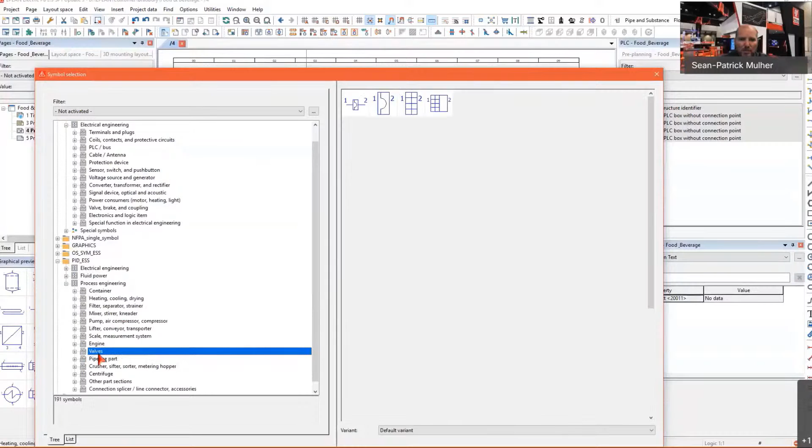Here we've got our electrical engineering symbols. These are all of the actuators. Then we've got our fluid power symbols, which are pneumatic or hydraulic actuators. And here we've got our process engineering symbols, which are all of our symbols, such as valves, piping components, engines, and so on.

All of these symbols can easily be selected and then inserted into the drawing to start your design. However, Eplan provides you with a much easier and quicker approach to start your design. This is called the macro technology. The macro technology is a collection of symbols that have already been created and combined into a specific circuit.

Let's say I need a tank, so I'm going to insert a macro. This macro contains a tank with already predefined valves and ports. So let's take a look at this tank with 3 ports, and there's my graphical view of that tank that I can easily now drop into my pre-planning structure.

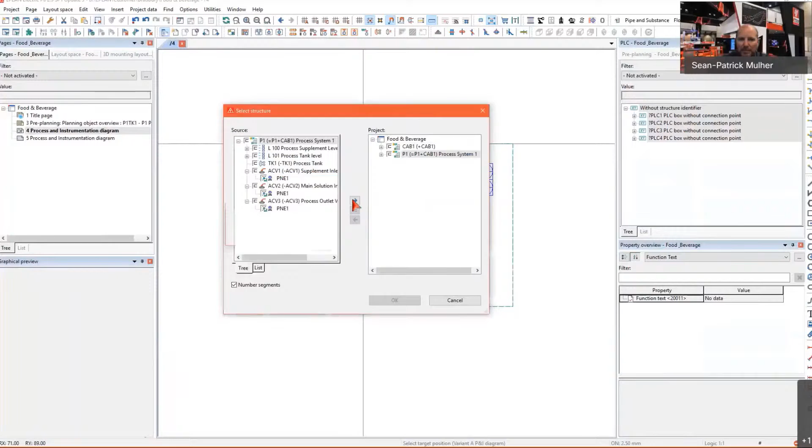Here is my process system 1. It carries with it some level sensors, the tank, and also some air control valves. These are my pneumatic valves with my pneumatic actuators. I'm going to bring in that system here and add it to my design environment.

So this is one way of really quickly and easily starting off your P&IDs by inserting already predefined sections. Now I've got my air control valves, I've got my level sensors inside the tank, and under the level sensors you can also see that I have my level functions associated with them.

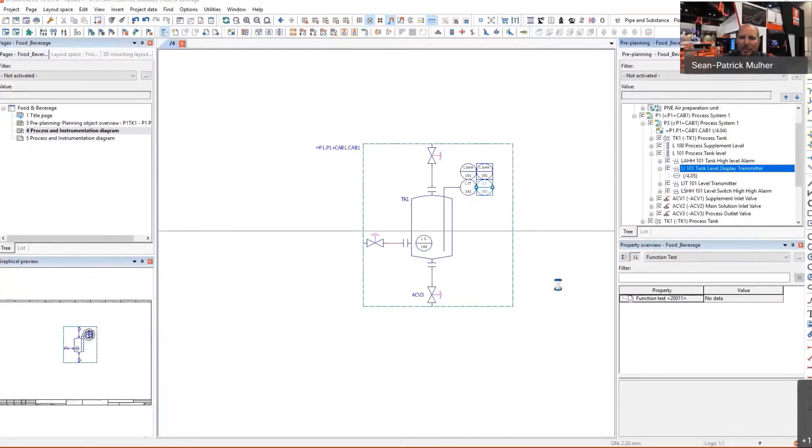And if I synchronize the data, I can easily see this information available in the tree. Each one of these objects can carry any type of data to help you with reporting or managing that data for your design environment. So here you can put cost of construction, planning, or software if you want to. You can add technical values such as minimum, maximum values, state of aggregation, type of substance, and so on.

Then I'm going to insert a pump. I need to carry my substance into the tank using a pump. So I'm going to insert a window macro. This time it's not going to be my tank, it's going to be a pump.

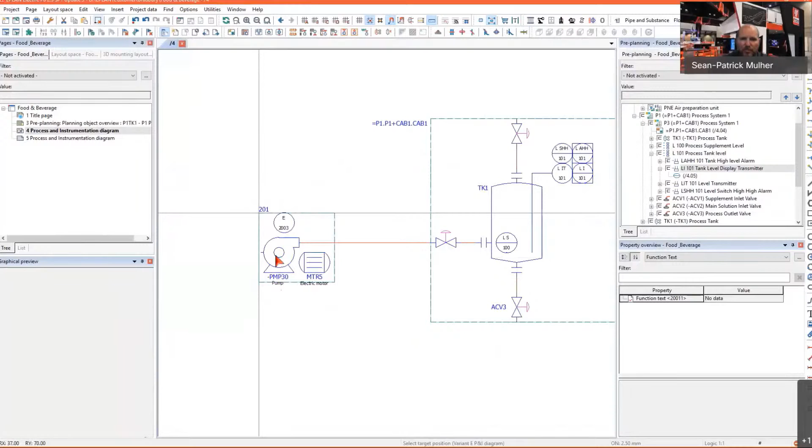And this pump, using the tab key in Eplan, you can actually carry up to 16 different variations of the pump. So here I'm just going to drop a pump for my supplement process. So this is this one here. I'm going to add it to my process 1.

And I'm going to carry another pump for the main ingredient up here. And then using my connecting symbols, you can see that the system automatically places the lines and you don't have to do anything additional.

Then I'm going to insert a substance, so identify the substance that I want to pump into my tank. So here's my substance. So I have a supplement here.

Bringing this in also brings with it all of the piping information - what type of pipe is needed, is it stainless steel, what the size of the pipe is going to be, what the class is, and everything additional associated with it. Here's my second piping definition coming with it and defining that particular environment.

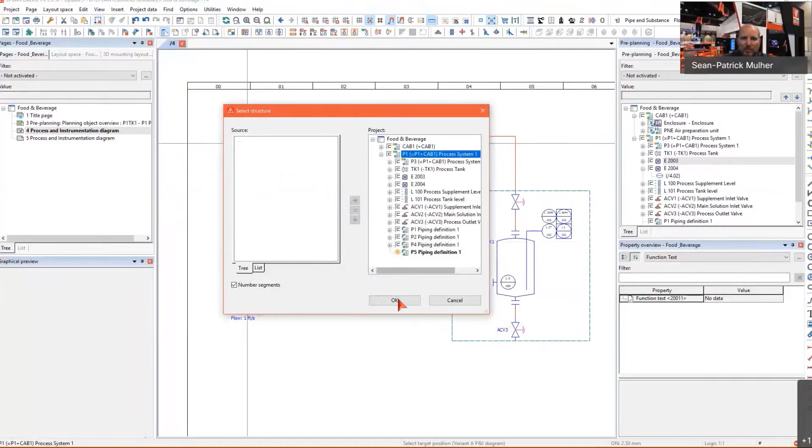So as you can see, creating P&IDs is really easy by simply using the macro technology in Eplan, helping you lay out your data structure.

Now, I've created a P&ID. Now I'd like to design the control system for these particular valves. As I mentioned earlier on, it's the tie-in between Eplan pre-planning, which is your P&ID structure, and Eplan fluid. So now in this case, behind each valve, I've also got the valve actuator, which is my pneumatic actuator.

And if I look at this actuator, I look at the properties of that actuator, I have some data, but I also have a macro. And this macro allows me to simply drag and drop my pneumatic control system directly into my design. So here is that control system associated to that valve.

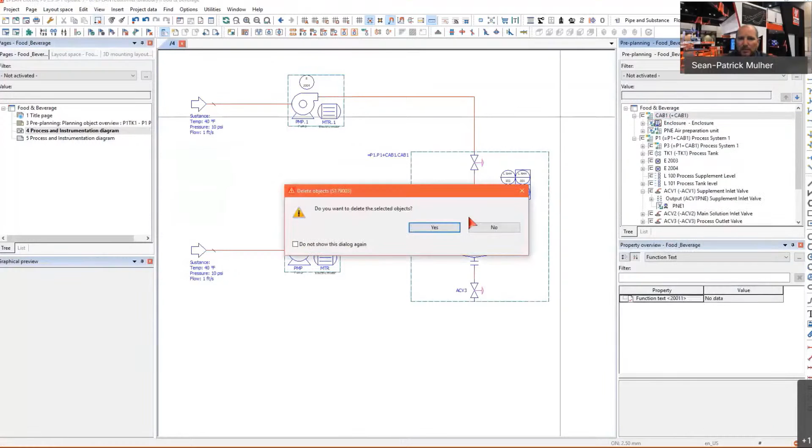But before that, I need an air preparation unit. So let's insert an enclosure. I'm going to delete this one here, and let's just insert an enclosure into my system. So insert pre-planning macro - it's going to be my enclosure system.

This enclosure system, via drag and drop, I'm going to create my electrical power supply. So you can see here, I've got my power supply. Then I'm going to create a new pneumatic air preparation unit. So here's my pre-planning object. This is going to be PNE1. It's going to be my air preparation unit.

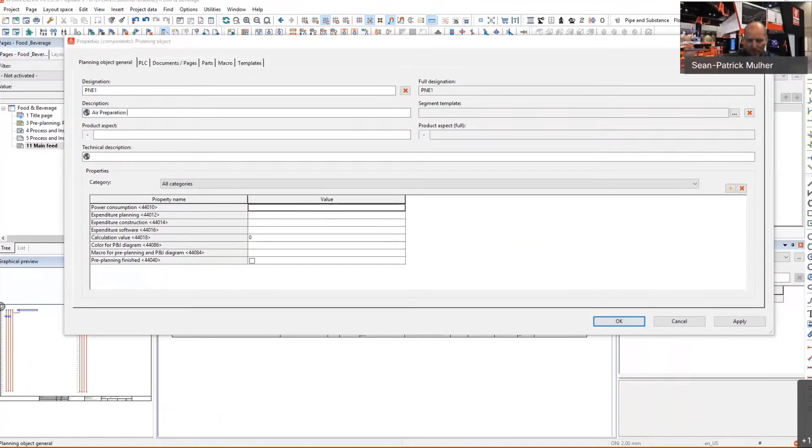And behind this air preparation unit, I'm going to store the macros or the design needed for that particular system. So here again, I'm going to use the macro technology in Eplan to help quickly and easily lay out that particular system.

So if I go here to my P&ID, my machine layout, pneumatic. There we go. My air preparation unit is right here.

Okay, so now I've associated the circuit diagram to this object, and now all I need to do is take this air preparation unit, drag it into my system, and here we have my air preparation unit with all of the pneumatic controls, as well as my beginning for my valve manifold.

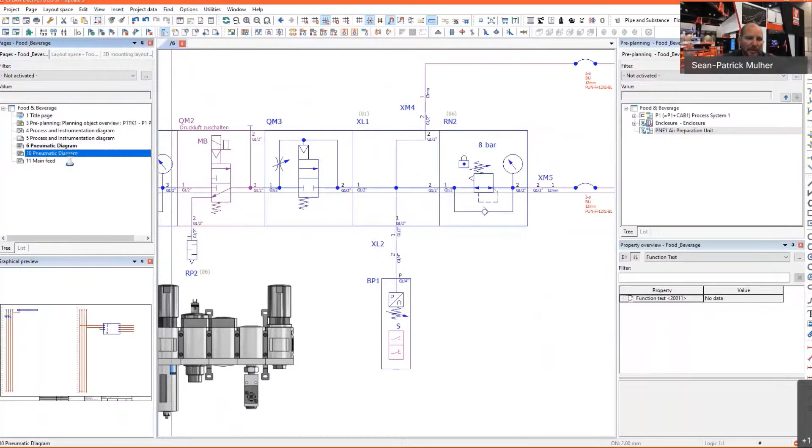So there's the start of my valve manifold, there's the end of my valve manifold, and now I'm going to link it up with all of the air control valves that I've placed in my P&ID.

So if I open up the P&ID and I look up those three different pneumatic controls, I'm going to select them, and via drag and drop, I can just drop them into my system, and now you can see my process system 1 now has my air control valve, ACV3. There's my supplement inlet valve, and it's connected to my valve manifold, and it's connected also to an I/O.

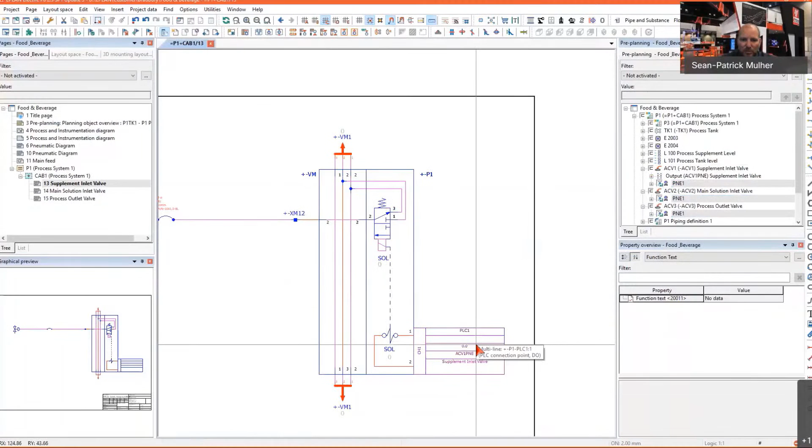So using pre-planning allows you to create your objects up front for your P&ID, but also capture the objects that you'll need for your pneumatic system, and via drag and drop, easily integrate these designs into your detail engineering. Hence, making it a lot easier to quickly create your P&IDs as well as your pneumatic control system.

So that was a brief view or introduction to pre-planning using Eplan fluid for food and beverage applications and streamlining your controls design.